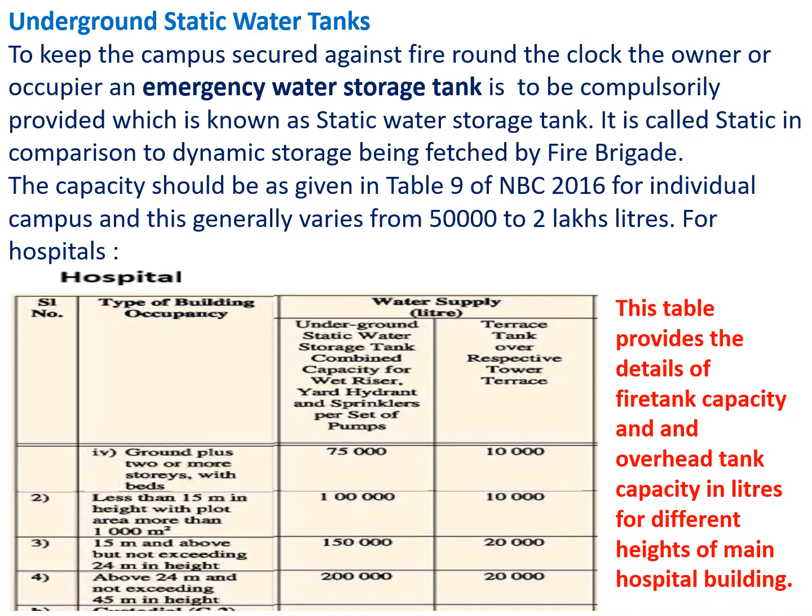Friends, I am taking one more case of business buildings. You know, business buildings are those where transactions are carried out on the basis of checks, not cash. This includes all office buildings, sale tax, income tax, and buildings alike. In case of business buildings less than 10 meter in height, the static water tank is not required, whereas the terrace tank has to be of capacity 10,000 liters, and somewhere it could be 5,000.

You have to see note number 6 provided at the end of the table. These notes you can always see at note number 6 at the end of the table.

When a business building has height more than 10 meter but not exceeding 15 meter, it has to be 50,000. Whereas in case of buildings having heights above 15 meter and up to 24 meter, it has to be 1 lakh, and the water tank on terrace has to be 10,000.

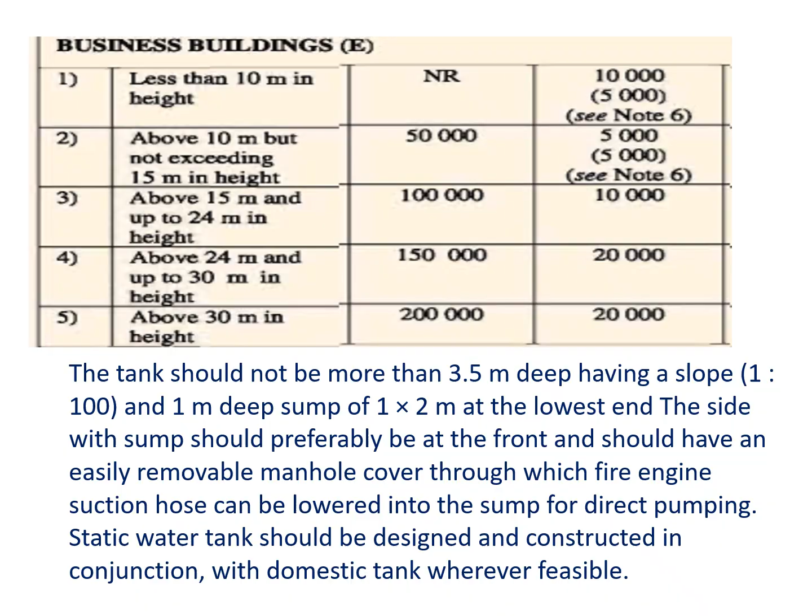Dear friends, let us revise the components of an internal hydrant system. An internal hydrant installation comprises the following elements.

A static or terrace tank for storing water for firefighting purposes. From this static tank, we take the water into rising mains, and from the terrace tank, we take water into downcomer mains or external mains to feed water from source to the required point under pressure.

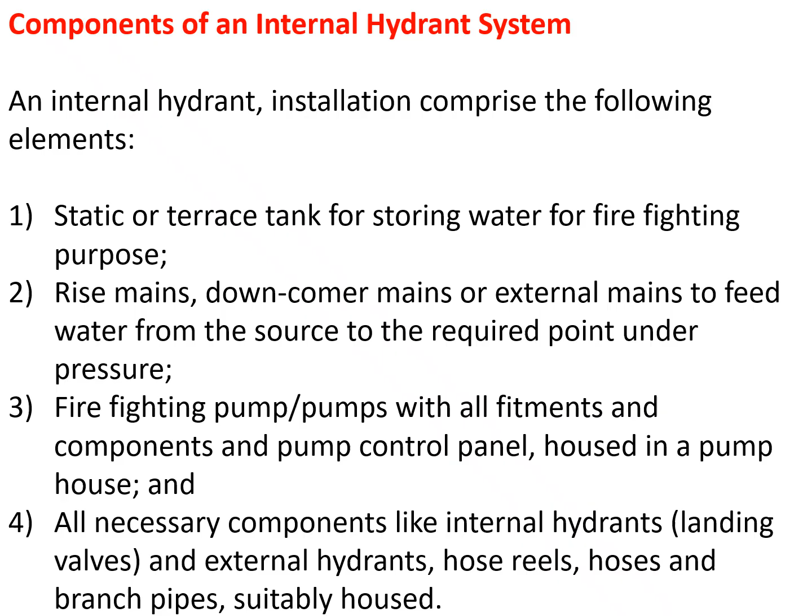Firefighting pump or pumps with all fitments and components, and pump control panel, housed in a pump house. All necessary components like internal hydrant, that is landing valves, and external hydrants provided as yard hydrants, hose reel, hoses, and branch pipe suitably housed. These are the components of an internal hydrant system.

Dear friends, I am showing the schematic diagram of a pump room as provided in National Building Code 2016.

The water tank can be of two configurations: one with negative suction, and another where the fire pump is provided below the tank, so it gets a positive suction. This is the suction point. This is the suction point, and pump is below the tank.

Now come to the tank. The tank should be provided with two compartments. In both the cases, these are the two compartments, and the components of this tank are...

4 numbers of 63 mm inlet, known as fire brigade inlet, which is provided at the exterior boundary of the campus, and from where, in case of emergency, the water is sucked into this tank.

The tank is provided with a manhole, and since the tank is having two compartments, this is the compartment line, one compartment, second compartment. Both the compartments are provided with suction pipe connected permanently to the fire pump.

The tank is provided with overflow and vent, so that when the tank is full, the tank is getting water supply from the municipal corporation, as well as in case of emergency from the fire brigade.

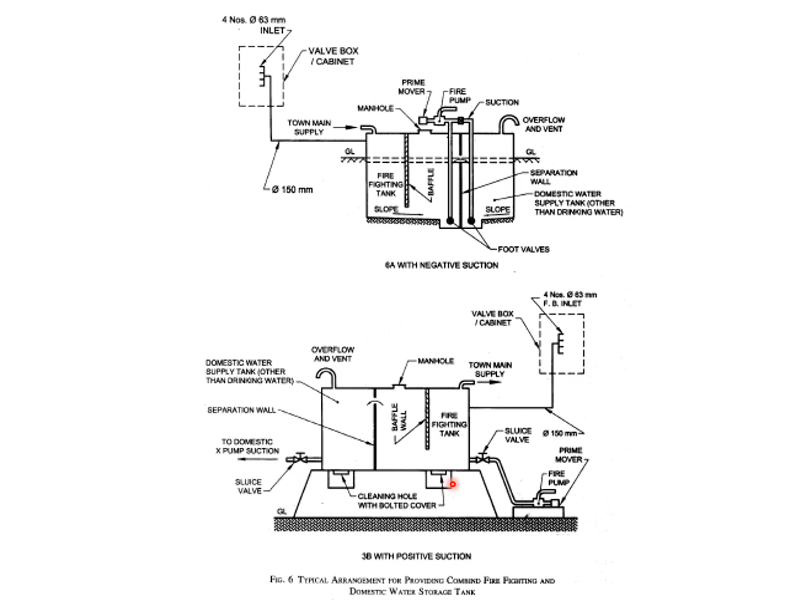In both the cases, you can clearly see that a cleaning hole is provided in case of positive suction, this one. And I'll show you another diagram next.

Friends, this is showing the requirement of underground tank. Underground tanks should be provided with compartments with external interconnection at bottom level, having gate valves at both ends for periodical maintenance and cleaning purposes.

At least two manholes, each of adequate size, with cover conforming to Indian Standard 1726 Part 1 of year 1974, should be provided on the tank outside the pump house, so as to facilitate fire appliances to draw water from the tank when necessary.

Access road to the tank, where located outside the building, should be at least minimum 6 meters in width, and the same should be designed suitably to bear a load of fire appliances weighing up to 18 tons. The access roads should be kept free from encroachment and obstruction at all times.

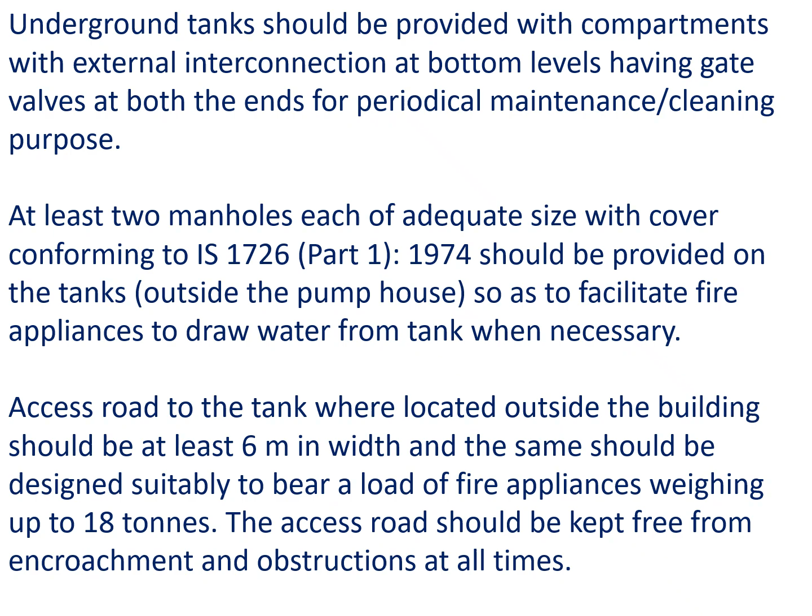Friends, once again, the requirement of designing the pump house. The pump house should be located preferably outside the building with a minimum clearance of 6 meters from the adjoining building. The pump house should have adequate natural ventilation with windows fitted with expanded metal for protection.

If the pump house houses a diesel pump, the exhaust pipe of the diesel engine should be extended to outside the pump house and exhaust discharged at an appropriate height in open air.

The floor of the pump house should be sloped to the farthest end to drain away any water leaking from glands and valves.

The pump house should have normal lighting and also emergency lighting facilities, either from a second source or from a generator. If the pump house is located inside the building...

Either on floor one or in the basement, it should be separated from the rest of the building by a wall having 2 hours fire rating, and a fire check door at its entrance having 1 hour fire rating.

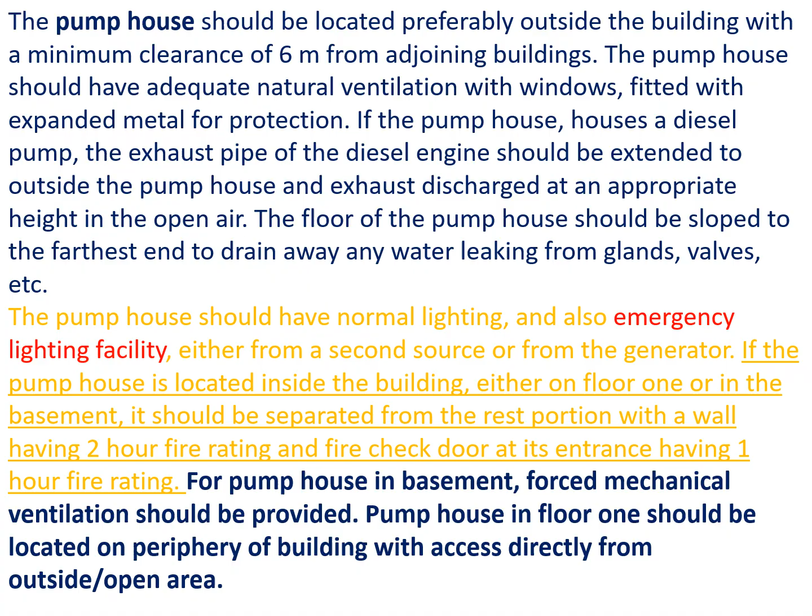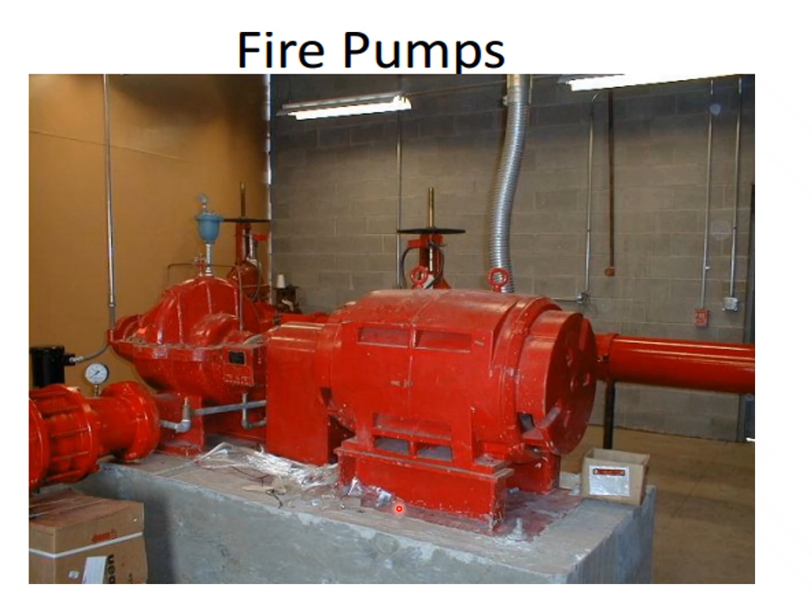Friends, this diagram shows a diesel engine driven pump. This is a multi-stage pump with vertical split casing.

In case of vertical split casing, these are casings housing several impellers. It is multi-stage, known as multi-stage. There are several circular impellers provided with

suction and delivery from this, and this is the coupling of the pump with the diesel engine. The pump and the diesel engine are both provided on a chassis, and below the chassis there will be springs so that the vibrations are not transferred to the structure.

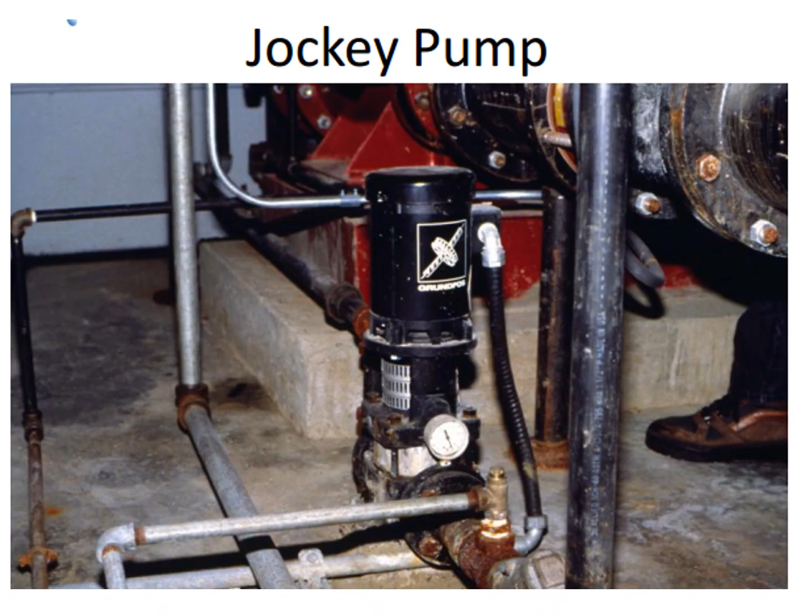Friends, as stated earlier, a diesel engine pump and an electric motor run pump are always provided at minimum. One more pump is provided which is known as pressurization pump or jockey pump. It may be vertical type or horizontal, and it is provided to pressurize and keep the water line primed all 24 hours, 365 days.

Friends, let us discuss how a fire pump is selected. In practice, the design professional combines National Building Code 2016 capacity and pressure requirement with the detailed pump performance standard, Indian Standard 12469 or Indian Standard 15301 or NFPA 20, to select a fire pump whose HQ head and discharge curve meets both code mandated system demand and pump performance criteria.

The CPWD demands the pump to be selected as per NFPA, and the NFPA requirement is that the pump shall furnish 150% capacity at not less than 65% head. This can be seen like this: this is 150% discharge at 65% head. So this is the required curve, HQ curve, according to which the pump should work.

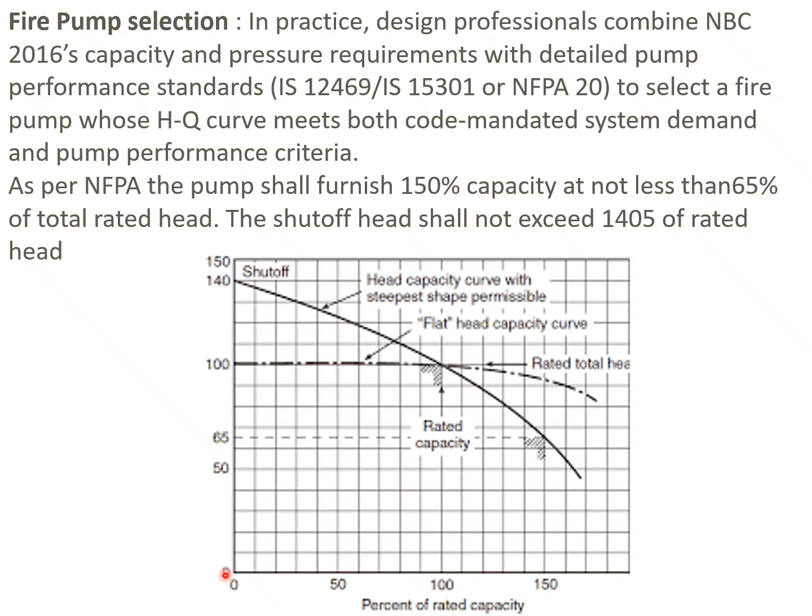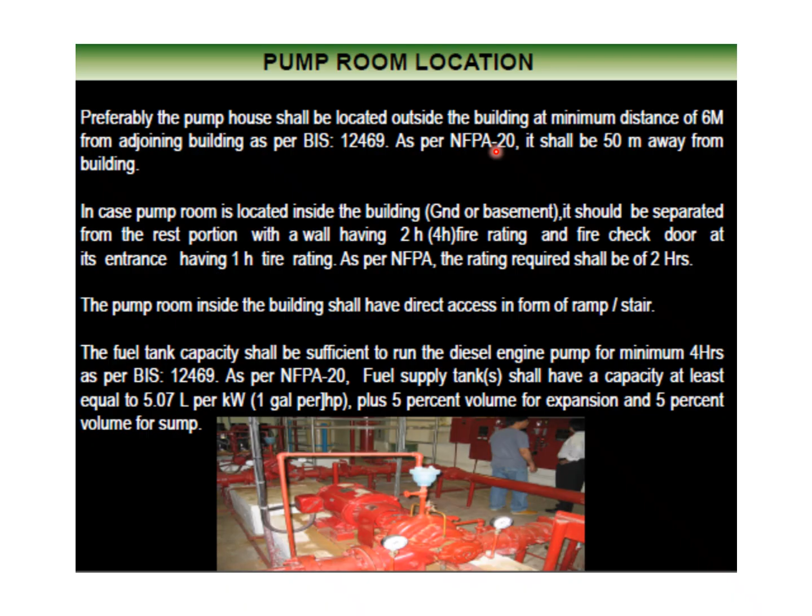Friends, as we know, there shall be a minimum of 3 pumps as per National Building Code, and there may be any more number of pumps. Normally we require one diesel pump, one jockey pump, one electrical pump for one wet riser, another electrical pump for yard hydrant system, and one more pump for sprinkler. So we have to arrange them as per requirement given.

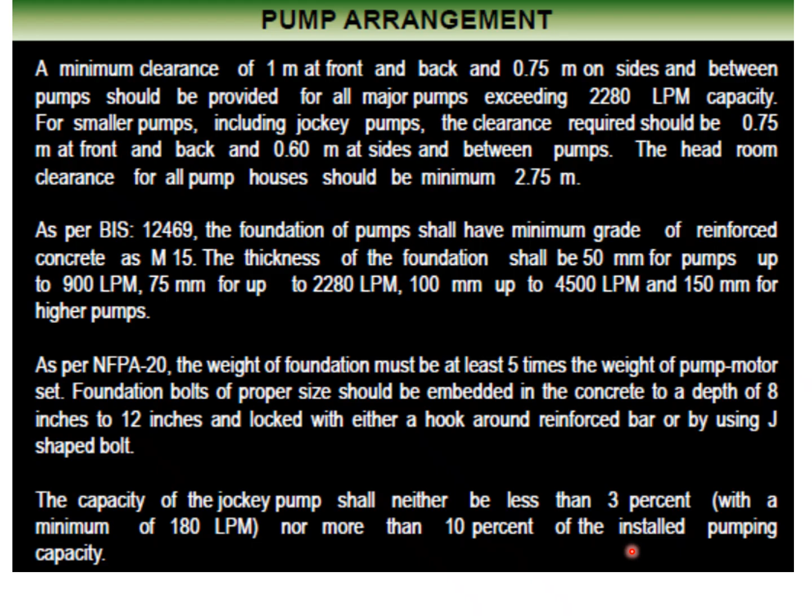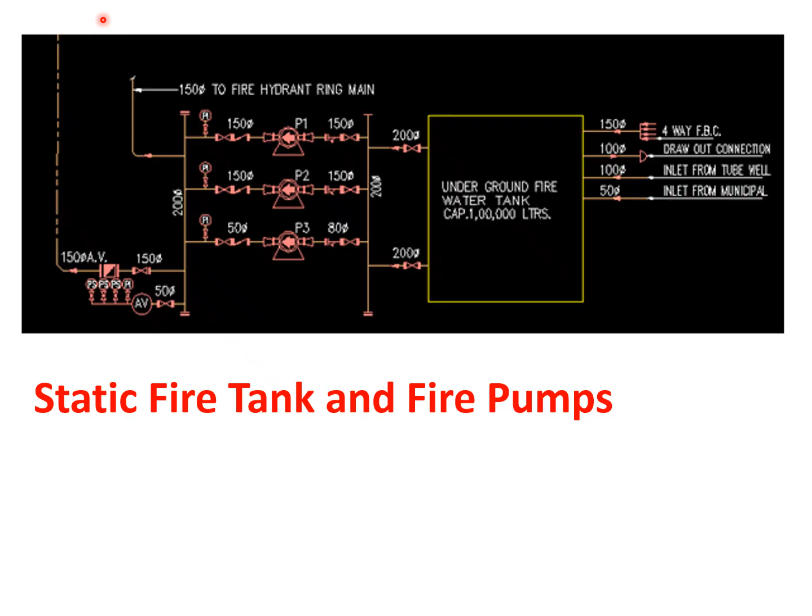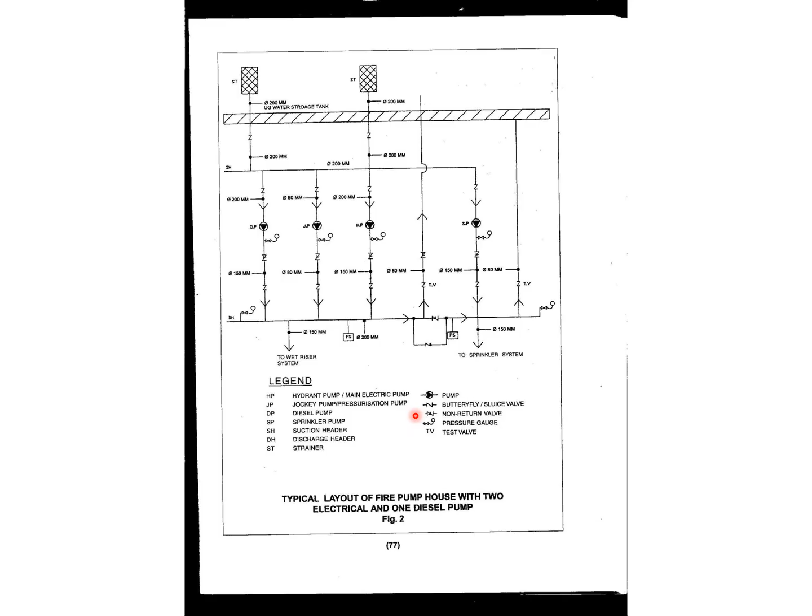Friends, this is the schematic diagram of pumping sets working in parallel, and the legend provides what is what. HP is hydrant pump, main electric pump. JP is jockey pump or pressurization pump. DP is diesel pump, they are shown here. Then SH is suction header and DH is discharge header. ST shows strainer, and different types of pumps have been shown here along with their valves. The three types of valves are shown here, and the pumping arrangement has to be made accordingly.